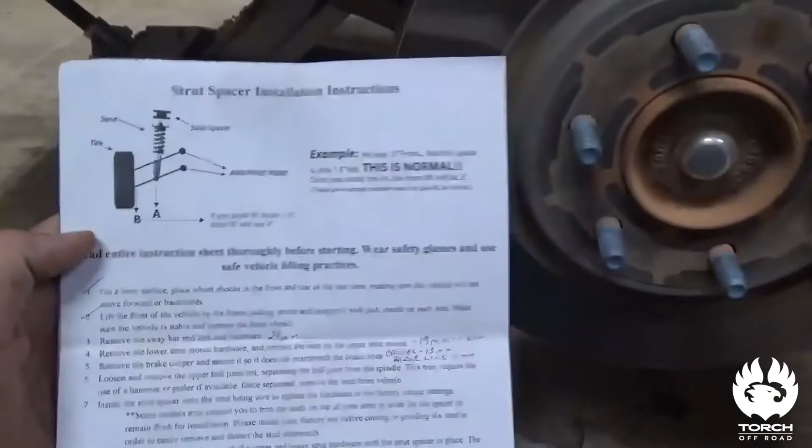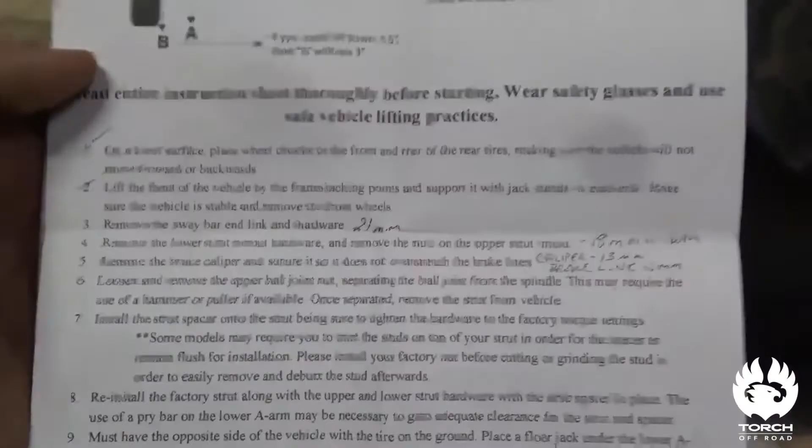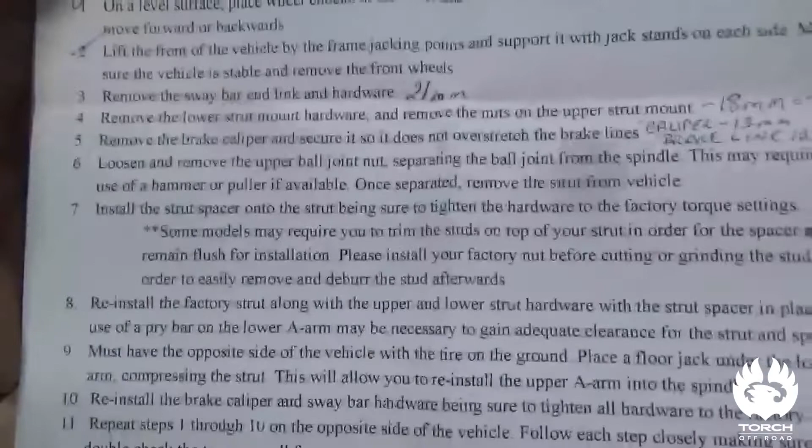On to where we're going to get the lift. Directions here. Like I said, 1 through 11. I go through and I check mark things, and then I've put the size of the wrenches for each line for what you're dealing with here, and I will put that into editing so it's easier to see. But first thing we're going to do is, since it's up here, I put some WD-40 on everything, and we are going to remove the sway bar end link, which is this right here. That's a 21mm wrench. We're going to go ahead and take that off.

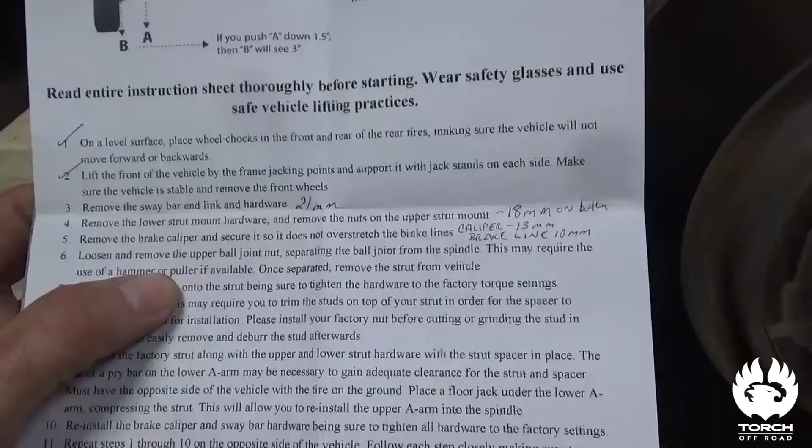The lower strut mount bolts off, which are these right down here, 18mm, and then we will loosen off those top ones up here. There's 3 up here, of course, like every other vehicle. Sorry, that's hard to see. Let's get back here. You got some light. You can see them up here. There's 3 of them on top, 18mm also.

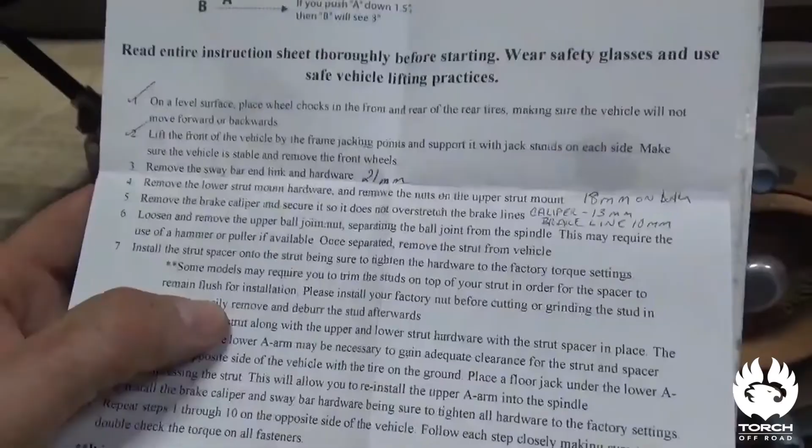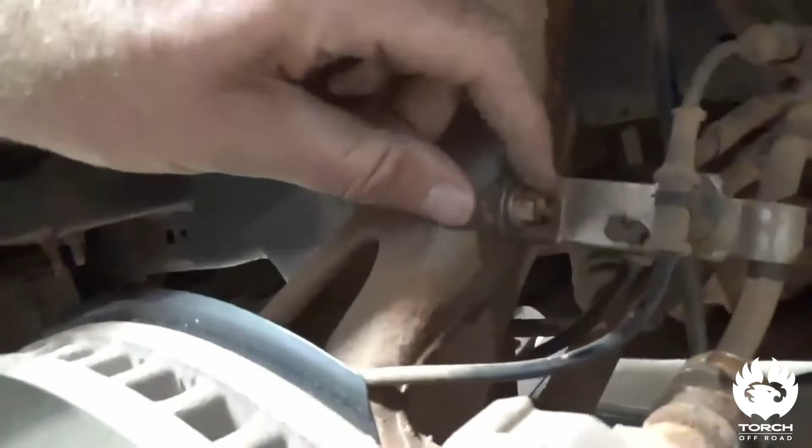And we're going to remove the brake caliper, which is this here. And this nut here is going to be a 13mm. And we'll be able to pull that caliper out of the way. And you'll want to hang it up here somehow with a rope or a wire or anything like that where you don't break these brake lines. And what I do is I take the extra step and just go ahead and pull this bracket. That way you got some leeway to move some of this stuff around in case you accidentally drop it or you pull a spindle too much.

And after that is going to be the dangerous spot, which is the upper ball joint. This is the last thing you remove, and once I get to that point, I will go ahead and explain a little further on safety on that. Even with the wheels off and A-arms hanging all the way down, there's quite a bit of load on this spring right here, so you don't want to get yourself hurt. So we'll go ahead and pull everything off. I'll show you that as we go, and then once we get here, I'll show you a safety precaution to do, and then we'll start putting our new spacer in.

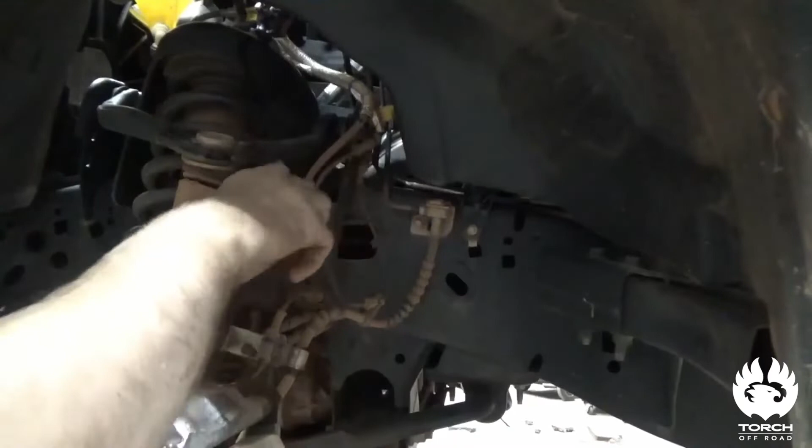This actually has a hex key in the middle to hold it, so the whole thing doesn't spin. So let me grab a hex key real quick. Just hold that here, spin your nut around. That's loose and out of the way. I'm gonna go ahead and just put that nut on there so I don't lose it.

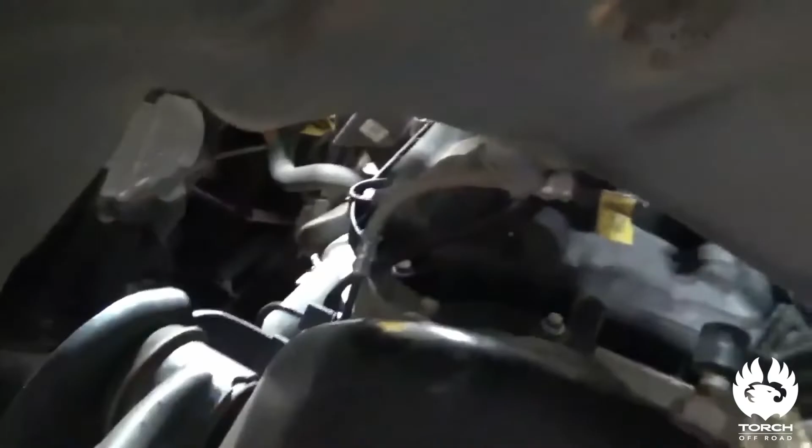Here is your 2 lower strut mounts. These are 18mm like I showed you. So it's the same thing as that sway bar link I just showed you up there. Just pull these nuts off, these 2 here, and then we're gonna come up here and do the same thing with these. Here, and you can actually get up underneath the hood here on this Ford. It's got a lot more room than my Chevrolet did. You can get up there and knock them out with a ratchet or an impact if you got it.

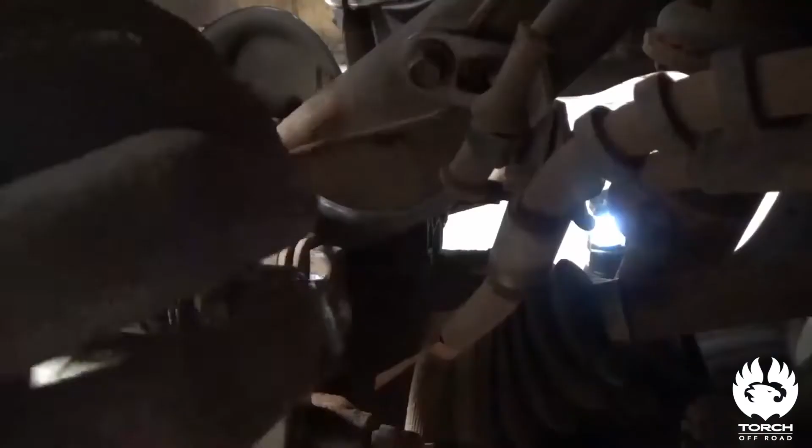Alright guys, on the brake caliper, use your 13mm to get these bolts out here. But this little retainer, or whatever you want to call this thing, I've never dealt with before. See how it kind of spins with the nut? It wasn't allowing it to spin out, so what I did was I got a 15/16 wrench just to hold it in place. And then got my 13, broke it free, and then once you break them free from each other, it'll spin right out.

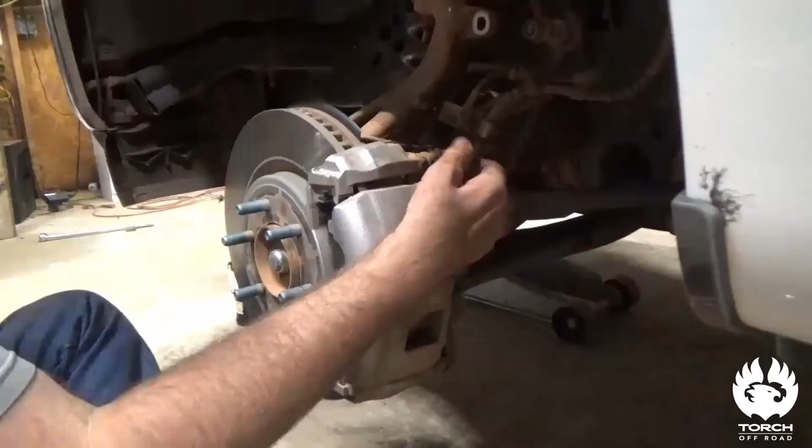Get your 2 bolts pulled out there. Get you a pry bar, flathead screwdriver, whatever. Go ahead and remove your caliper, and this is where you'll need to hang it with something so you don't stretch your lines.

You can pull these pads off if you want. They're in there pretty good now. And then I'll get my 10mm. Go ahead and pull this bracket off. Guys, got the brake caliper off, and I got it hanging with a piece of wire from underneath the hood, so it's good to go.

Next, we're going to get our tie rod end off. This is also 21mm. And then we're going to get our upper ball joint. This is 18mm. And I'm going to show you real fast. Like I said earlier, even though we don't have this sitting on the ground with the tire on it and everything and weight on it, there's still load on this spring.

So what you need to do is get you another jack or something underneath here and just push that tension off of it just a little bit to where you've got some bind or some load on this lower A-arm before you take this off. Because if you don't, you risk that thing shooting down and coming out and smacking you right in the face, which is also why I left these nuts up here. So that way if it tried to go anywhere, at least if something shot this way, that spring would stay in there and hit this mount up here. Tie rod end, just gonna break that off real fast.

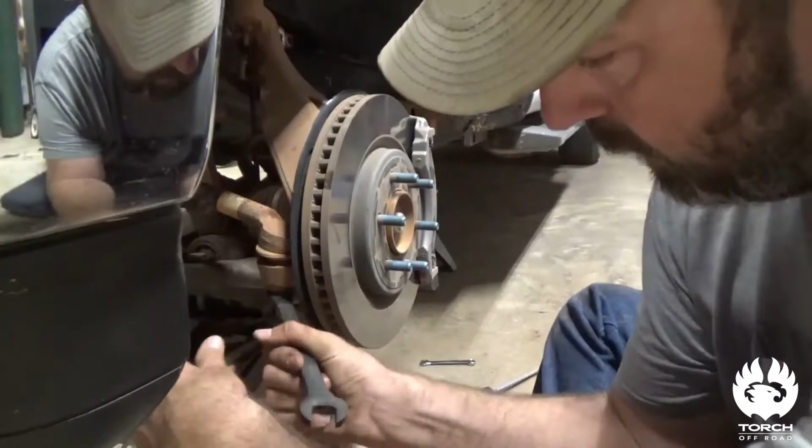Nut is off. Now what I do, if you've ever seen any of my other videos, they have tie rod tools, the pitchforks. I don't ever use them on these. One, you tear up the boot. Two, it's just that much more work and it doesn't really work that well to me. I just hit the spindle here. Now, you just need to give it a few love taps, you know? Nice and easy. Just don't hit your dust shield. There it went. She popped up.

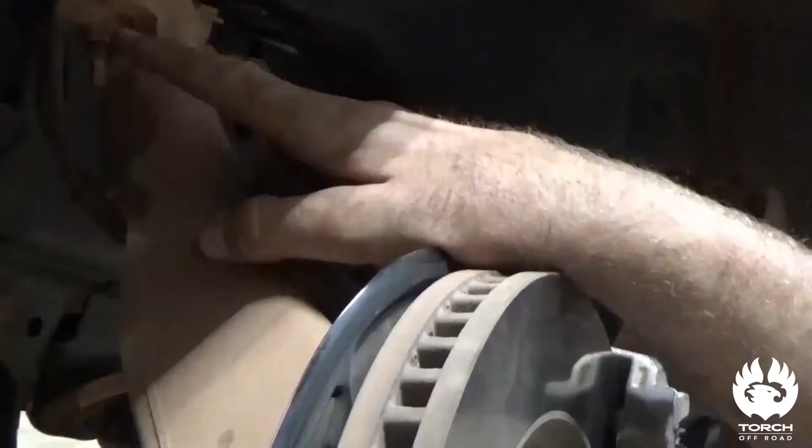We're good to go. So right here, that's the last piece we're taking off, and this is the dangerous one. So what I've done is put a jack down here underneath the lower A-arm, put some tension on it, just raise it up a little. Don't raise it up so high you pull it off your dang jack stands, but just get a good load on it. Then we'll bust this free right here, and then we're gonna do the same thing we did on the tie rod end. We're just gonna hit the spindle here till it pops up.

All right, we're right about the end of the threads. Now you can see we got that space there. Don't stick your finger in there. We got space right here, and this hasn't separated yet. So what I'm gonna do is hit this just like we did on the tie rod end here to allow that to separate, but this is gonna hold it from shooting off. And we also got the jack down underneath the lower control arm for extra safety. So these are all the precautions I take, and it's helped me a lot over the years without having any major damage or injuries.

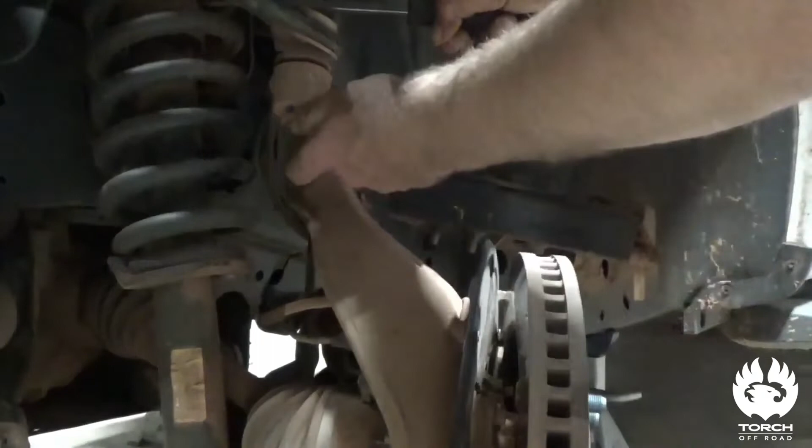There it went. See it pop? Still has some good tension on it. We'll get that 18, and it has got some pretty good tension. So what I'll do is go ahead, put a little more load on the jack there. Yeah, okay, so I can move that by hand, so it's all right. The load is pretty much off of it, so it's safe to go ahead and separate this thing. For added security sometimes, I'll get a bar or something like that and just push this down, so you know for sure it's not gonna fly off and smack you.

And just let that go. Boom. Now we're ready to go ahead and finish pulling these nuts off the top of your strut. And then we'll lower that control arm down, pull the strut out. That's off the upper strut mounts.

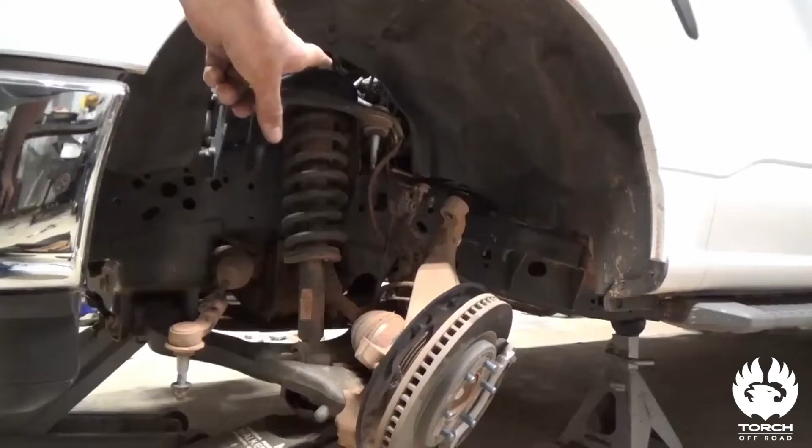Now the nuts are off the upper strut mounts, so what I'm gonna do is go ahead and take the pressure off of that jack, let that thing come down. Be sure just to watch your brake lines and everything, make sure you don't have something pinched or something like that. And lower it down, and we'll pull that strut out.

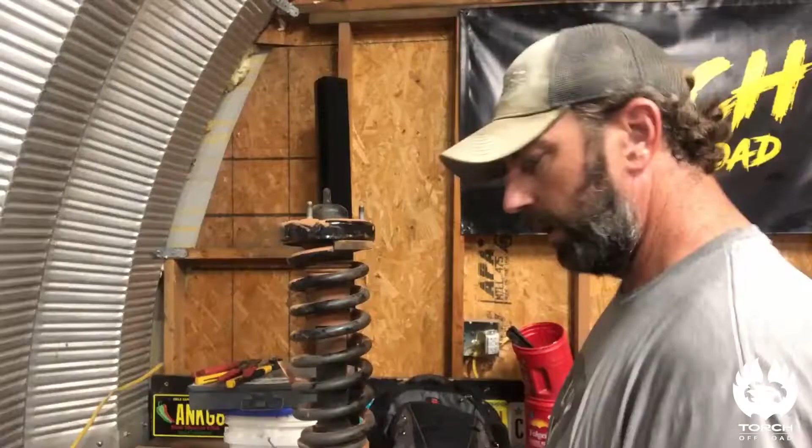Hey guys, sorry the camera cut off. All right, so you've got your supplied spacer with the 3 spots for your 3 stud holes from the factory here. You're gonna take these supplied bolts here that are hex socket style. You're gonna run them in the other 3 holes, and they're already threaded. So you can see the threads there.

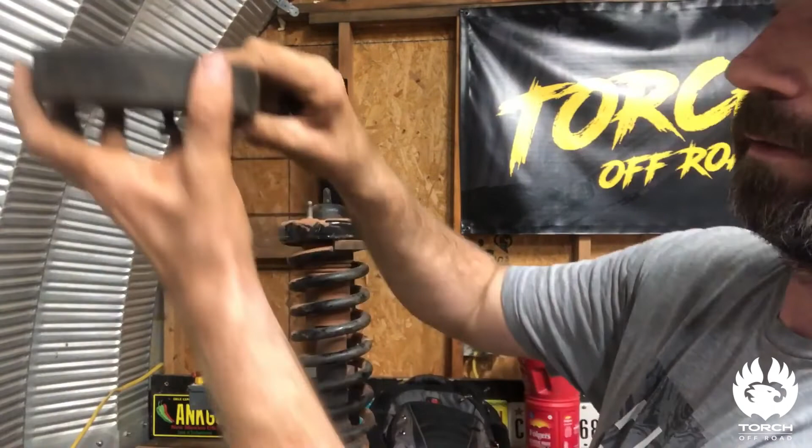So what you're gonna do is the spot that's drilled out, you're gonna screw these all the way in, and then your original stock bolts go right there, and that'll give us your spacer, and these become your new mounting studs. So we'll go ahead and run those in real quick. It's pretty simple. Just run them in like so, all the way till you bottom them out.

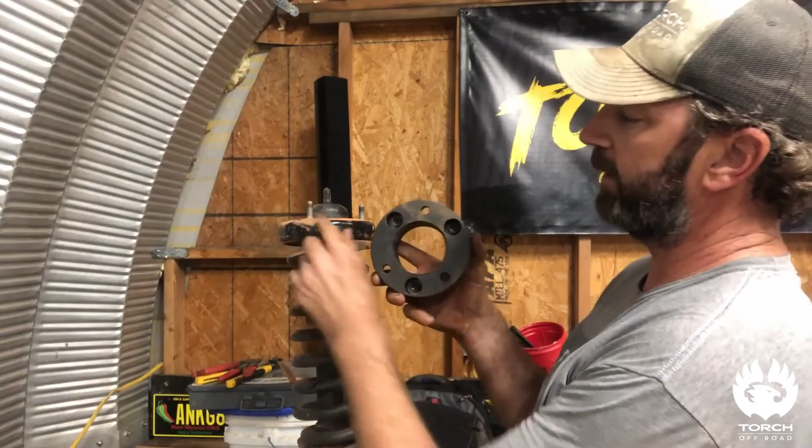So there's one. You see it's all the way in there. That'll be your new mounting stud. So I'm gonna go ahead and run the other 2 in there, and then we'll put it up on the strut. All right, you got all 3 secured on there. Now, you're just gonna put your factory bolts right here in the other 3 holes.

Boom. Now, in the instructions, it states that on some models, these bolts may stick out of the top of your spacer here. And if that's the case on yours, you're gonna have to trim them off a little bit.

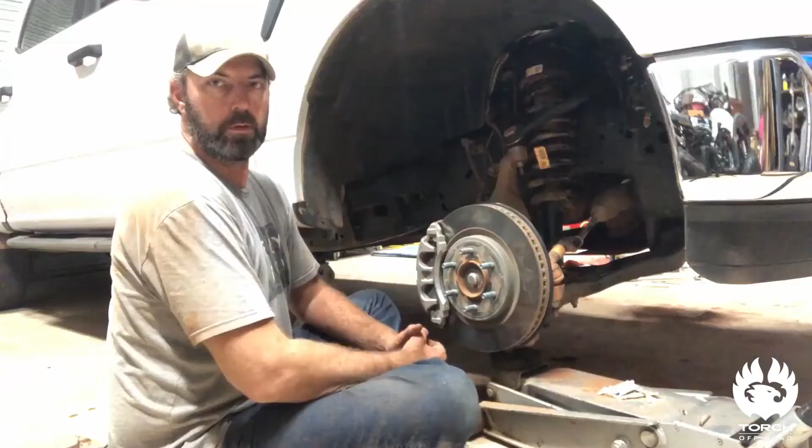All right, y'all, so finally got it back together. Everything's tightened up as it should be. So it's time to go ahead and jack it up a little bit and put the tires on it. Ready to see how it looks right now.

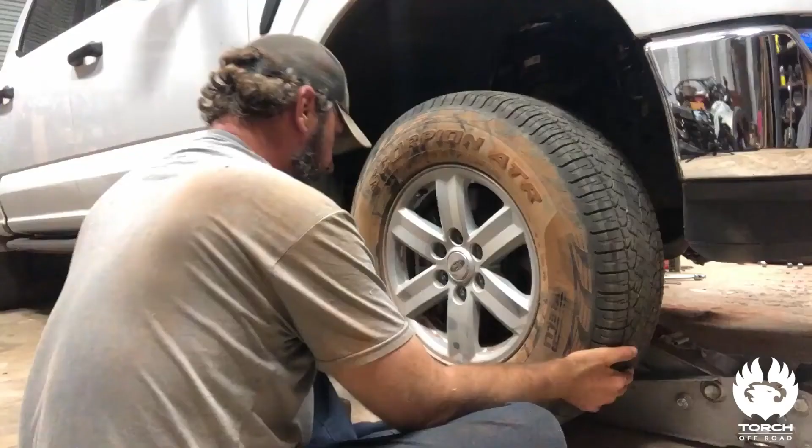Okay, so running into those A-arm issues, I wasn't ready for that. It is 3 o'clock in the morning. So I'm gonna go ahead and pull the truck out, go in and get a few hours sleep, and then I'll come back out tomorrow and get it cleaned up and let you guys see what the finished product is. So we'll see you tomorrow.

Well guys, here it is, finished product. Got some good wheel clearance here. So that's really gonna help on these rough roads we go on.